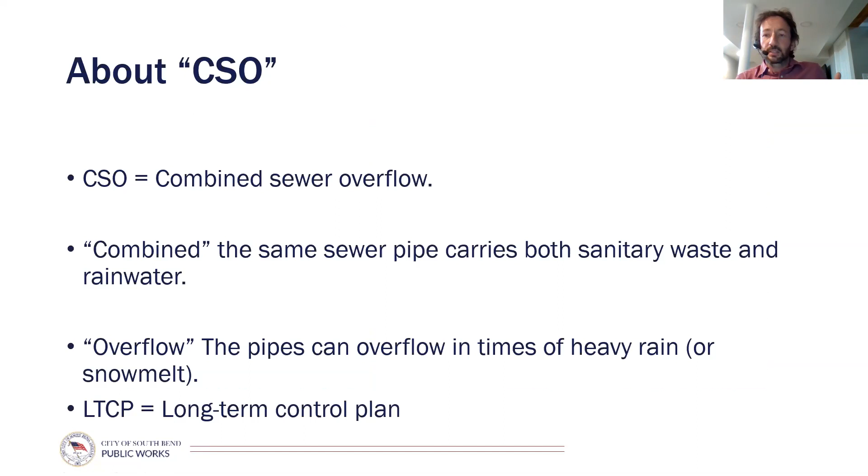So CSO, before we delve into too much, is combined sewer overflow. LTCP, which I'll talk about again today, is long-term control plan. I've covered those definitions already, so I'll just jump through these.

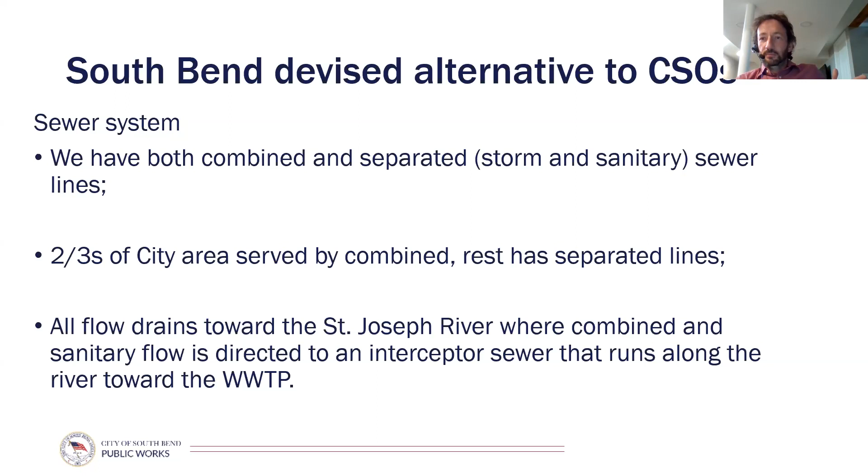Okay, so how the smart sewer system works - I can show you in a moment, open up Safari and look at the system itself. We've got about two-thirds of the city in South Bend that's combined sewer. South Bend is 42 square miles in area with 101,000 people, which by standards like Manhattan or London is very, very sparsely populated. That creates an opportunity here because it means we've actually got quite a large footprint, and I'll explain how that's important in a moment.

In principle, it means it doesn't always rain equally across South Bend's 42 square miles - sometimes it does, but a lot of times it doesn't, and that's one of the ideas behind this plan. We have 6 rain gauges across the community, and that shows us the difference across the community and how it gives us an opportunity.

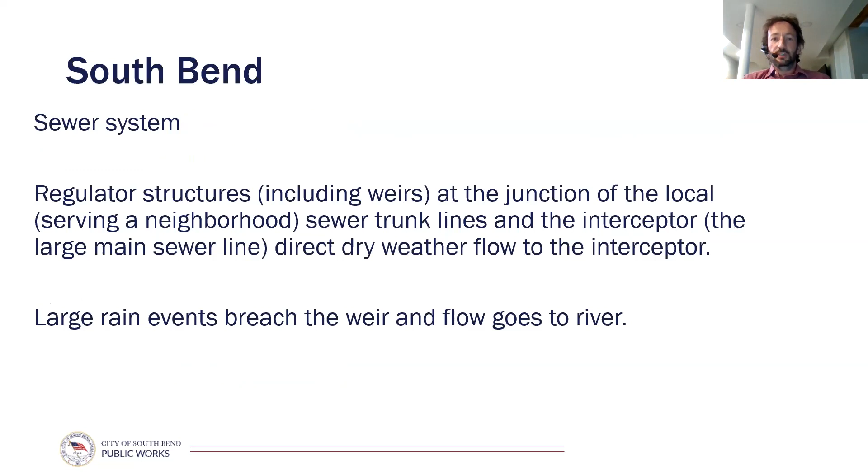If you remember from the diagram - yeah, I've got it coming up here again - what we've done with the smart sewer system, in essence, if you look at the line that's the throttle pipe I talked about, is left this throttle line in place. We've done nothing to impact the old system. The old system still works as it used to, which is fine.

But what we've done is put in an additional throttle line to connect the existing sewer to the interceptor, and that is the point at which we have control. We've exacted control on that by putting in smart valves that we can open and close, which gives us the ability to regulate the capacity of the interceptor to the sewers that need it most.

So if we have 35 of these sewer basins, before the smart sewer system was enabled, all of those had equal access to the interceptor. So you could have a situation where a neighborhood sewer wasn't raining at all, normal flow, and it was taking up capacity in the interceptor, causing upstream less capacity and therefore an overflow. Whereas what we've done is say, if your area is not in need of this capacity at the moment, you get limited. The area that would otherwise overflow gets the access and therefore prevents an overflow.

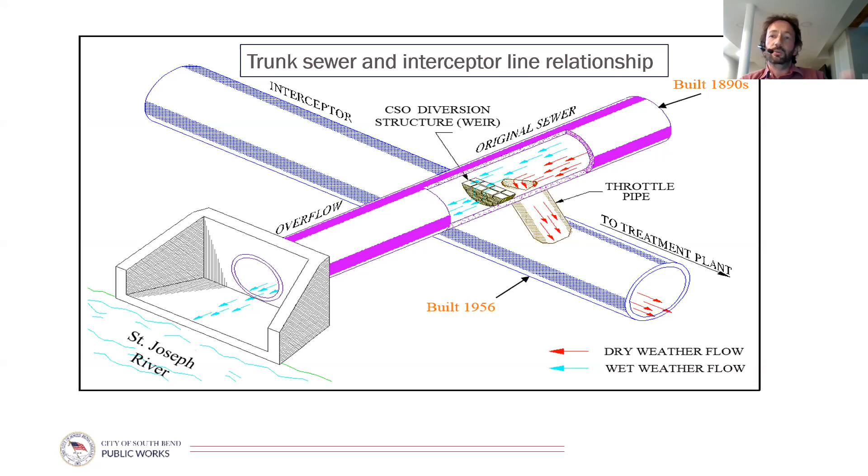And I can talk to you a little bit about how successful that's been at the moment. So, like I said, with the real-time control, how do we take advantage of that? And that's kind of important here too.

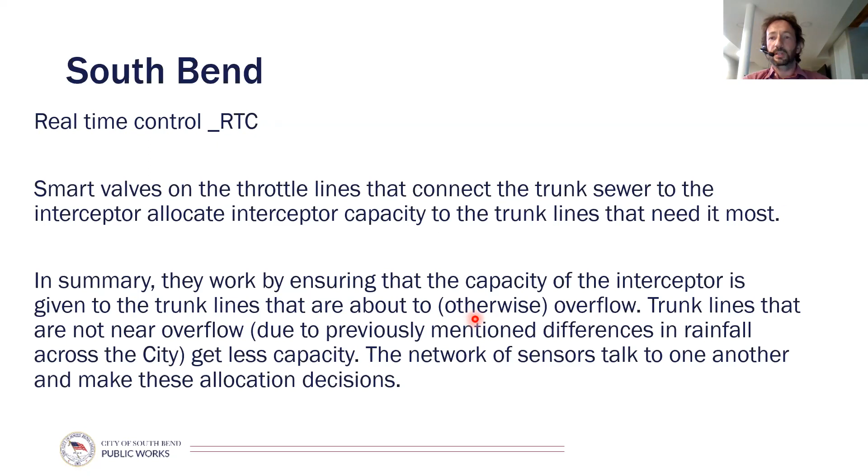So the smart valves that connect the throttle lines allow this. There's a system of sensors in each of these lines, and they all talk to each other, and they can basically negotiate, kind of like a stock market, where one can say, well, I don't really need capacity, so I'm only willing to pay like $1 per gallon for capacity. Whereas another basin might be in dire need of capacity, so in the algorithm that operates this, it'll offer to pay multiples of that. So therefore, that system will get the access to it.

Okay, so we maximize capacity, which meant allowing different sewers to have that capacity in the interceptor. So that was one thing. But the real way we were able to make a difference was what we call hyper-accurate modeling. I don't know how aware people are of some of these terms I'm using. Hopefully I don't want to be skimming over things too briefly, or likewise going into too much detail on things that are very obvious.

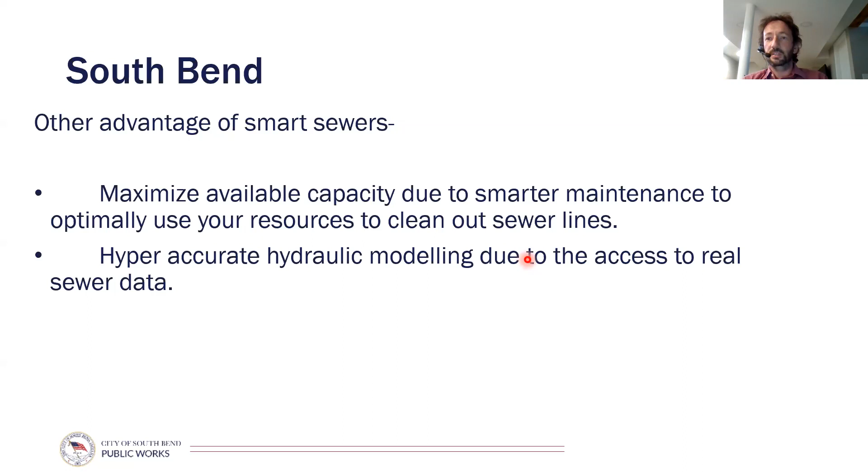Whereas with us, because we have this data from the system, we were able to design a plan for South Bend that's been able to save hundreds of millions of dollars, basically, and be hugely successful.

One of the first things that was really useful about the sewer system was that before, system maintenance was kind of an art. Maybe you do something in one area because it hadn't been treated before. Maybe somebody would get a call from a councillor, so they'd go to a certain area to look and see if there's an issue, or maybe there'd be a backup in somebody's basement and you'd have to investigate. But these are all items that, in the first couple of months of the smart sewer system being installed, were removed from the system.

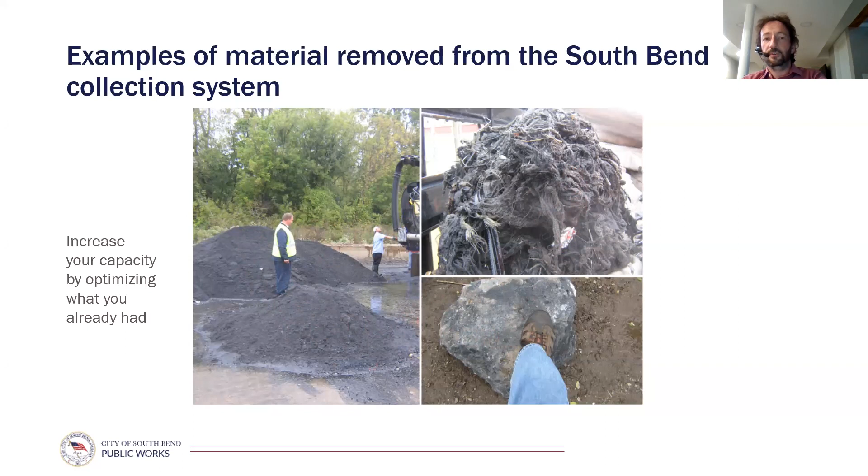Remember, we haven't really built anything in our long-term control plan just yet. We've done some small separation projects, but really most of the work we've been doing has been in relation to the smart sewer system.

Now, we'll have to see 2020 soon. Obviously we don't have all the data for it yet, but it has been a dry summer, so we'll see how that plays out.

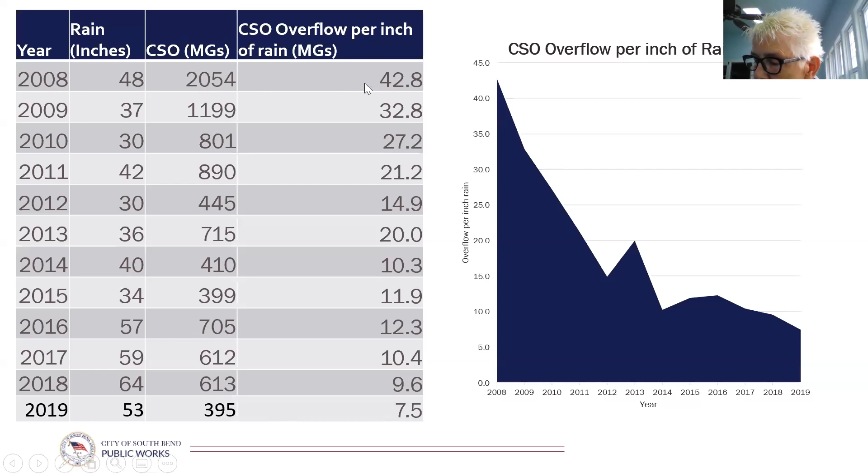So look back to 2008 - this is the rain, this is the CSO, and this was the overflow per inch of rain. We've had a big success in South Bend too by getting that way down to 7.5 from over 42. So that's been a huge success too.

And remember, we haven't spent a whole lot of money just yet, so that's one of the reasons why we're so happy with the system. And I must emphasize too, the system was unique and originated in South Bend, even though now it's been rolled out a little bit further.

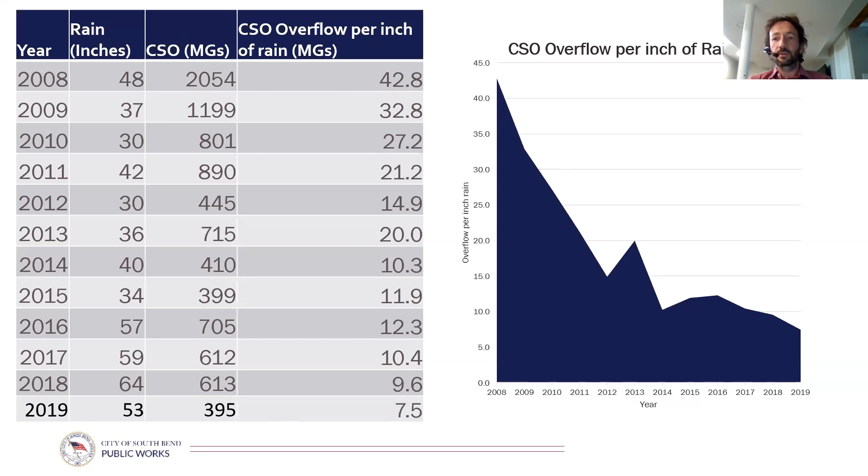What happened in these two years between 11 and 13 was South Bend fully rolled out the smart sewer system, in other words the real-time control aspect of it. That's been the big success and the big reason for that drop. It's not just hypothetical and it's not just about sewers—this is specifically about E. coli in the St. Joseph River.

But there's more to do. Obviously we know it's a huge success, but there's more work to be done there.

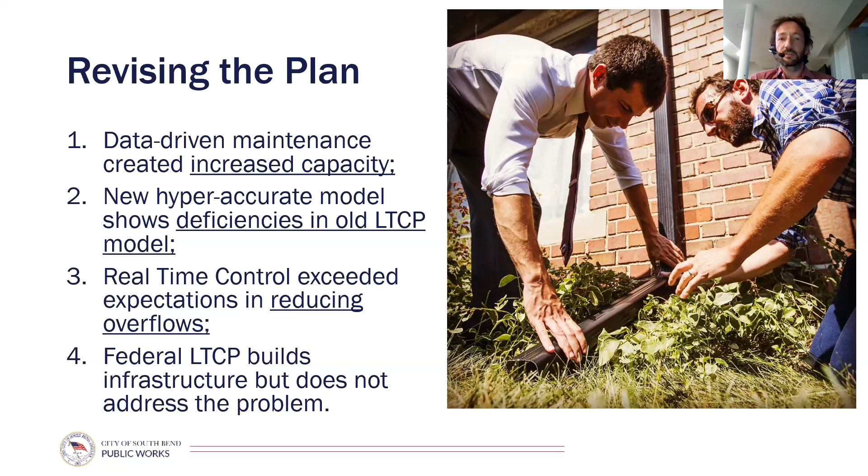So what the system has enabled us to do—I hope you don't mind, but I decided to talk a bit more today about the successes of the system rather than just the nitty-gritty of how it works, though I can cover that too. I want to show how it's been directly beneficial to the citizens of South Bend, and how it's something other communities across the Great Lakes area can do—and many are doing. It's a very easy plan to translate.

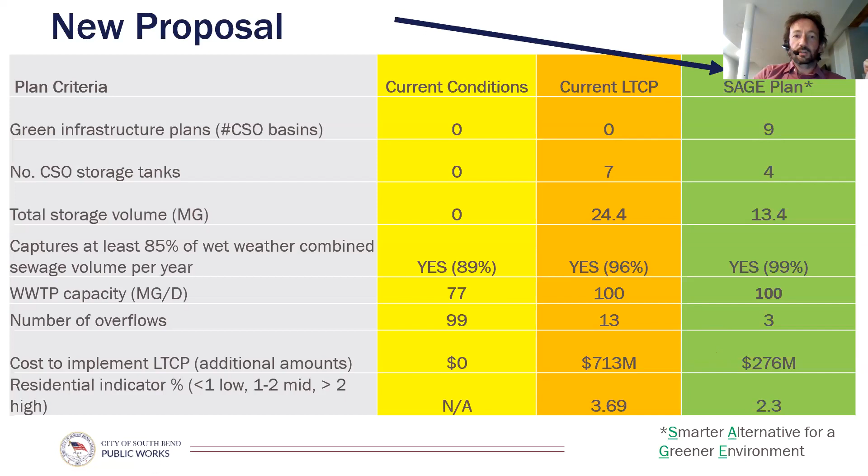So what does the plan look like that the South Bend smart sewer system has enabled us to have? It's 4 storage tanks. The first one - we haven't fully gotten permission to make this change yet.

Negotiations have been ongoing with IDEM and the EPA the last couple of years, and they're going very well. We're just talking a little bit about scheduling at the moment, but overall I think we're going to get to do this.

So storage tanks - there are times when a smart sewer system will not do everything. In extreme rainfall events, like if you get 7 inches of rain over a day or two, you're going to need to build your way out of that kind of problem. You can't just do everything with technology - you've got to be able to build storage tanks, that kind of thing.

So we recognize that, and these are the locations - not necessarily on these parks, but in that area. In the area of Memorial Park, in the area of Randolph and Sampson, and the area of Brownfield Park, we recognize there being a need to build storage tanks for those areas.

Also, increasing the capacity of our treatment plants, because the bigger your wastewater treatment plants, the more CSO you can treat and the faster it can treat, the more you're preventing it from going into the river. That's going to be hugely beneficial as well.

And then what we're calling a South Shore Interconnect is basically a new part of the sewer system that we feel like in South Bend we need to build, so that we prevent kind of an anomaly of the system - it crosses the river in a few too many places, and we're going to take that out because it's kind of a bottleneck and environmental hazard.

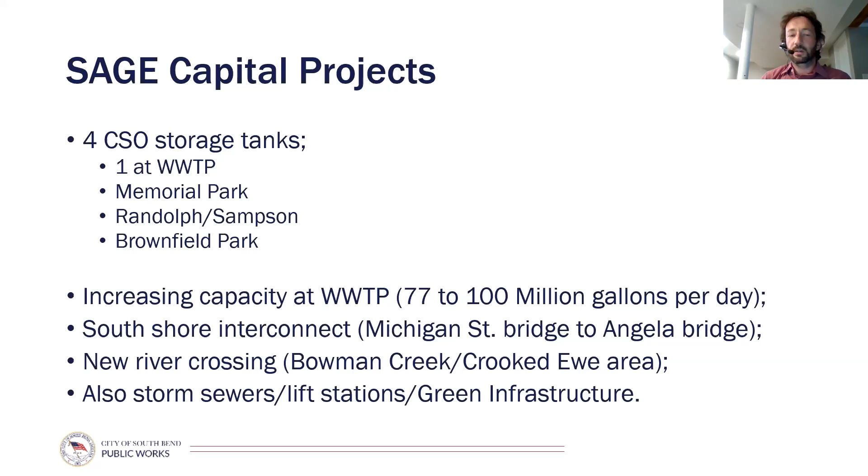Community support is also very important, because when the last plan was agreed to by the powers that be in both the federal and local South Bend government, there wasn't really any community awareness. I wouldn't even say there wasn't support for the plan - there wasn't even awareness for the plan, which is a problem.

Because at the time, people in public works went to the council and started the conversation at the point of, well, we need to raise rates because we need to do this plan.

That was the wrong way to start this process. When we redesigned this plan, we decided that we need to take the community along with us to a large extent and make sure there was buy-in on this new plan from the start, so people weren't shocked at the end to learn this is a $1 billion plan in South Bend.

From the perspective of community involvement, we've held public meetings since 2015 - 19 public meetings, and I think one more since, so that's 20. These meetings have been advertised and held either in council chambers or in public locations like one of our parks or at the Morris Bistro. We've also published 21 articles and stories between local newspapers and TV to get the message out there, and people are becoming aware that South Bend is doing things in this field.

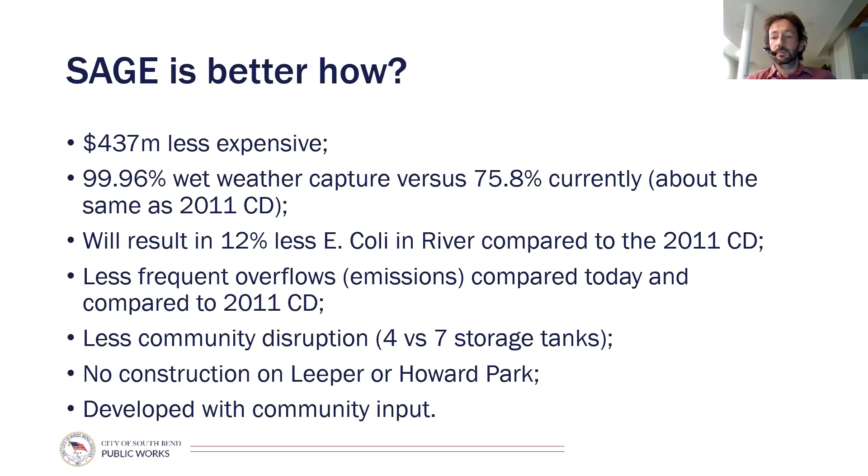Mining the data from the sewer system over the last couple of years gave us an unprecedented level of understanding of our system. That's the key difference, the key thing it has delivered to us and enabled us to do. And that brings me full circle back to the sensors in the ground as well.

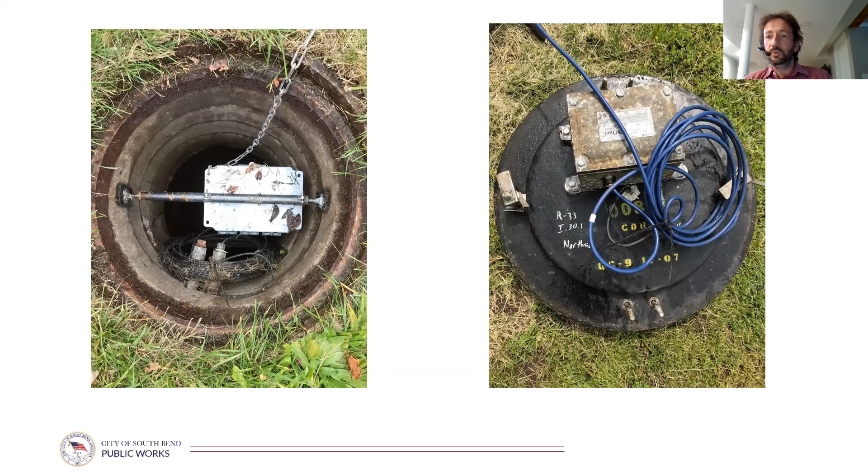If you'll bear with me for a moment, I'll go into the system briefly. I won't make any changes, just show you if everybody's willing. Okay, so if everybody still sees my screen here, this is it live at the moment. They call it Blue X.

A little bit of background: the system wasn't created by South Bend, but in a way it was too. A bunch of researchers from the University of Notre Dame back in the mid-2000s had an idea but no real way to apply it, so they brought it to South Bend public works representatives at the time, and used South Bend as a sandbox for these kinds of projects.

They called it CSO net at the time, so CSO, combined sewer overflow network. That eventually grew into a private company spun off from the university called EmNet. EmNet are still based in South Bend, and they've recently been acquired by a multinational stock exchange level company called Xylem. The whole thing has gone really big and been very successful, that's why you'll see this branding in the corner called Blue X, kind of their style.

So we can look at various CSO sensors throughout the system. You see Becks Lake, Bowman Creek, different CSO locations, rain gauges, and different stormwater ponds. You can select a CSO, say CSO 4, go to depth, and look at today. When you hit get data, you can see today being a very dry day, so the flow is very low at that CSO.

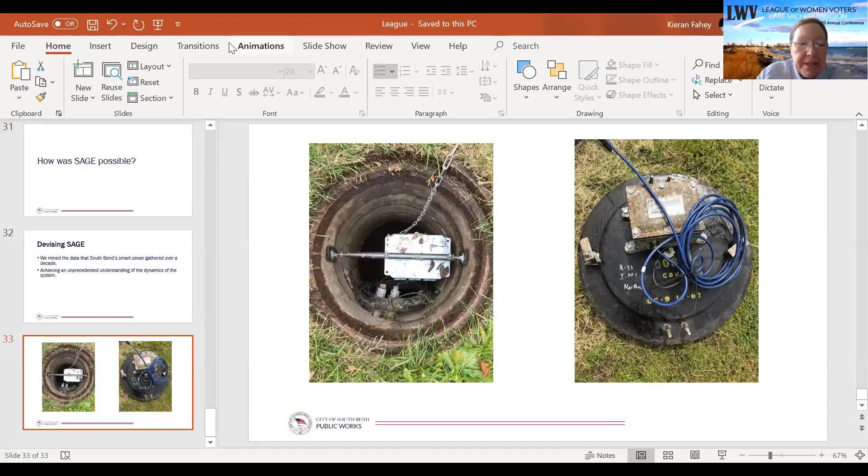Oh, I'm sorry about that. One second now, we're just seeing the two sewer taps. Okay, I'll stop sharing and start again. I know we're running out of time, so I'll try and do this quickly. Let me see, we don't want to hurry you. No, okay, let me see now if I can. Anything now? No, not yet. Okay, let me just try to share one last time. If that doesn't work... Okay, how about now? Well, something's happening.

EMNet time, yes, that's what I'm talking about. Sorry about that, I didn't realize. Sorry, folks, so I'll go back a little bit to show you.

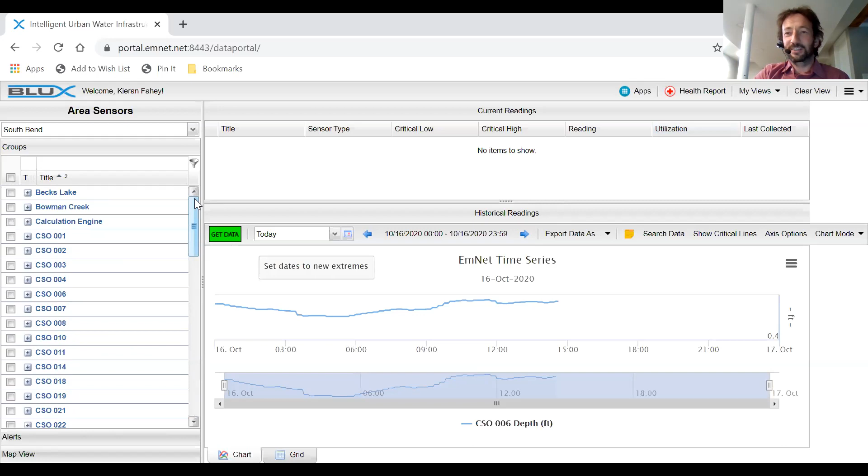So that's kind of it for me. I tend to talk too fast, so hopefully I didn't today, and hopefully everybody was able to get a sense of the kind of work we've done in South Bend. If anybody wants to talk or has any questions for me, that'd be great. Thanks everybody.

Thank you, Kieran, that was great. It's definitely a complex system, but it's great because it maximizes your efforts to keep water from flowing into the river untreated. So we do have questions.